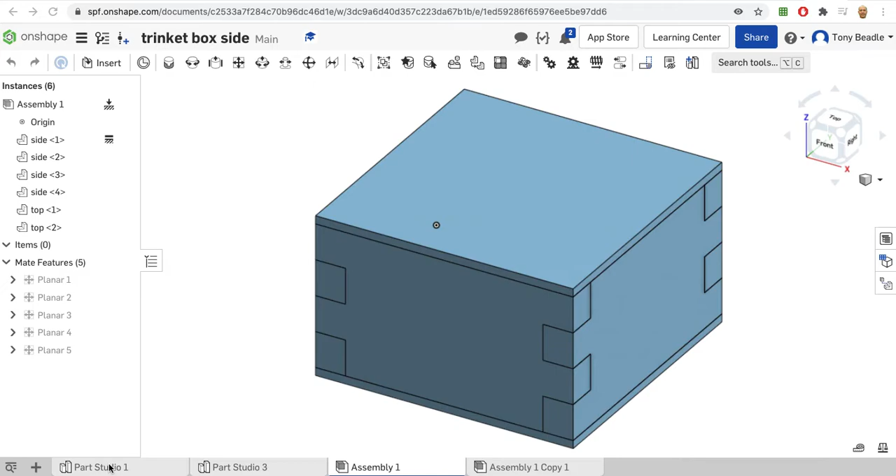For this video, I'm going to create a PC and Mac version of how to add a top and a bottom to your box. Okay, so you can see that I've got this assembled in this version here. I'm going to start by going back to Part Studio 1, which is the one that has the side panel on it, and we're going to create a new element that's going to be the top and the bottom for this box, which we know is 120 by 120 millimeters for its dimensions.

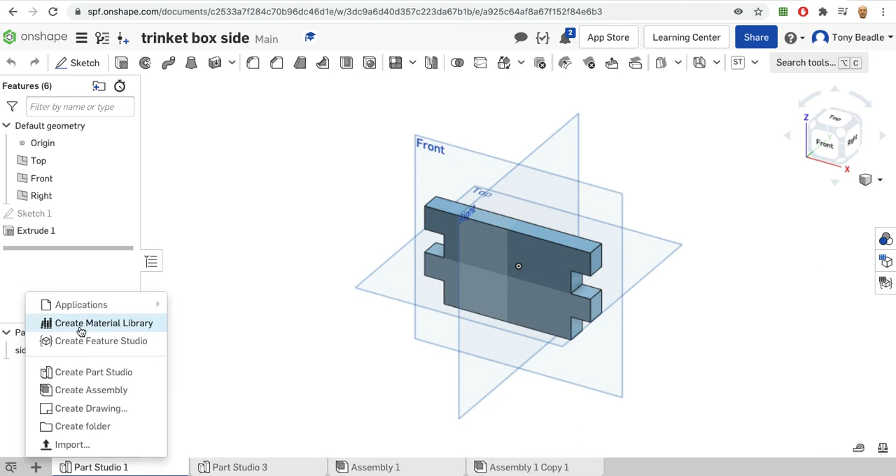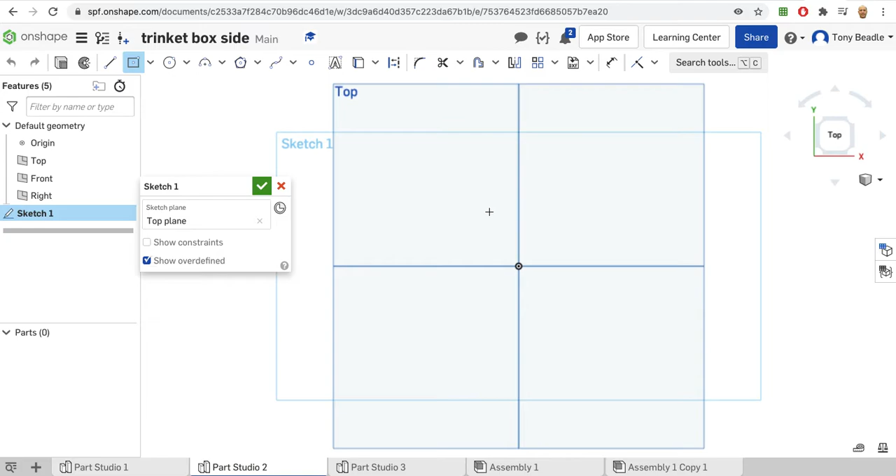So I'm going to go to the plus sign saying insert new element. I'm going to create a new Part Studio. Okay, and this will create a blank area for me to work on. I'm going to work on the top work plane and make sure I switch to the top view there. Under sketch, I'm going to click on the center point rectangle tool, move to the middle of my screen there, and drag out the shape of it.

Now with the PC version you get the dimensions appearing straight away, so we can type in 120 by 120. There we have our box shape drawn out, 120 by 120. Okay, I'm just going to take off that tool and just drag this dimension out of the way there as well, just so it's neat and tidy.

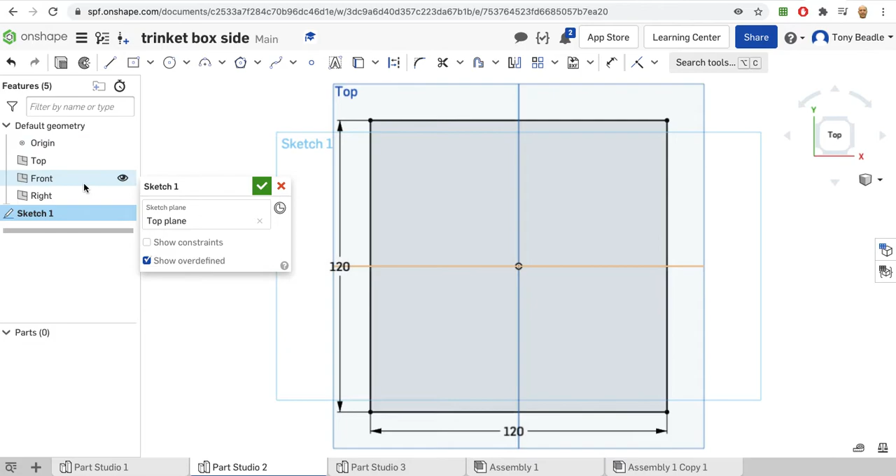Now with the sketch selected, I'm going to go to my extrusion tool and then extrude this. I know that the material I'm using is 3.8 millimeter ply, so change the depth to 3.8 millimeters and then green tick that to finish that off. So what I should have now is a panel that's 3.8 millimeters thick by 120 by 120 for its dimensions.

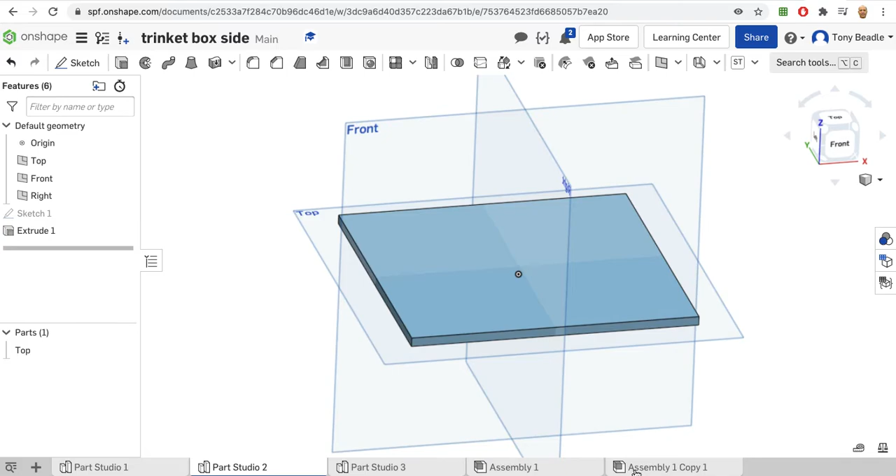Okay, and in the menu on the left hand side, I'm going to rename this part, so I'm going to right click on that and go to rename at the top there and just rename this as top. It will also be the bottom as well, but we'll just call it top for the moment. Now I'm then going to go to my assembly where I've been working, where I've got my 4 parts connected, and you can see here I actually renamed part 1 into side 1, 2, 3, 4 here, just to make it easier for me to identify parts.

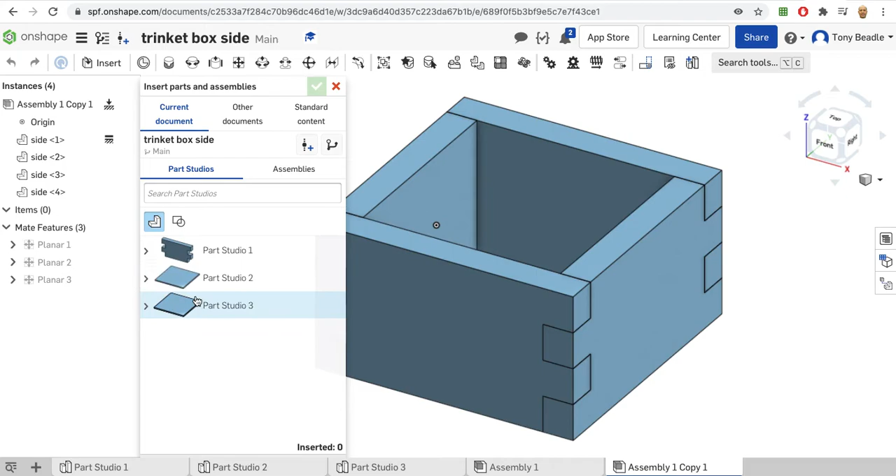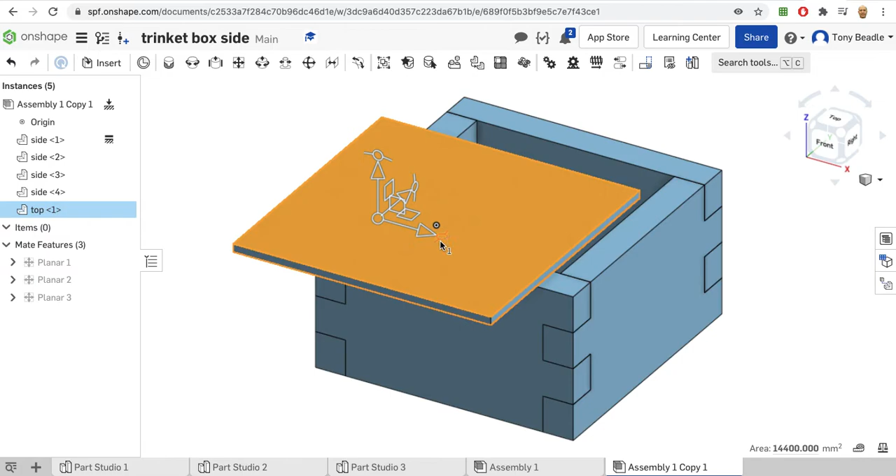So I'm going to insert, and I'm going to have a look and see. Now you can see I've created one already for this one, but this is the one I'm going to use. This part here, insert that. Okay, and that puts a copy of that onto the screen for me. And I get my triad manipulator here, which I can drag and move this part around to wherever I want to actually put it. Okay, now there we go, I can move it.

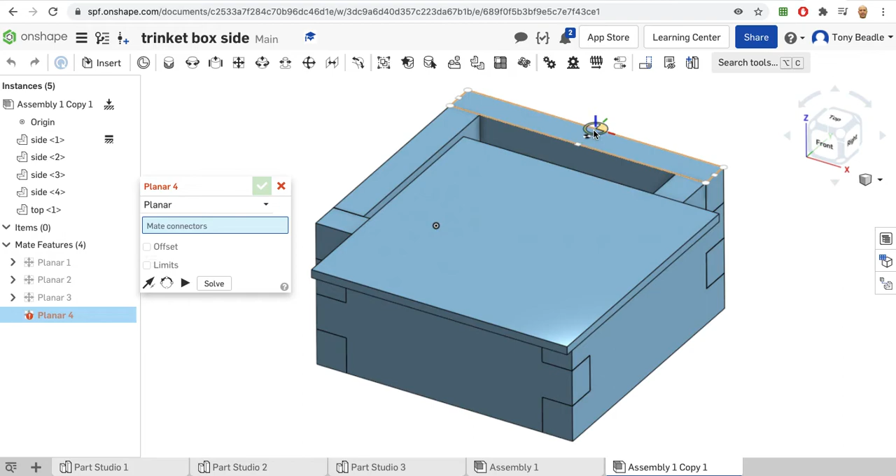So what I want to do is to mate this with the top of my object here, and then the underside of the new panel I'm bringing in here. So I'm going to choose my planar mate tool there. I'm going to click on this surface here to highlight it, and you can see there that it already shows the possible locations of mates. Now in the past we used the center one, but that's not going to be appropriate for this, otherwise our box will be in the wrong position. So I'm going to choose the edge of it this time, one of the edge tools there.

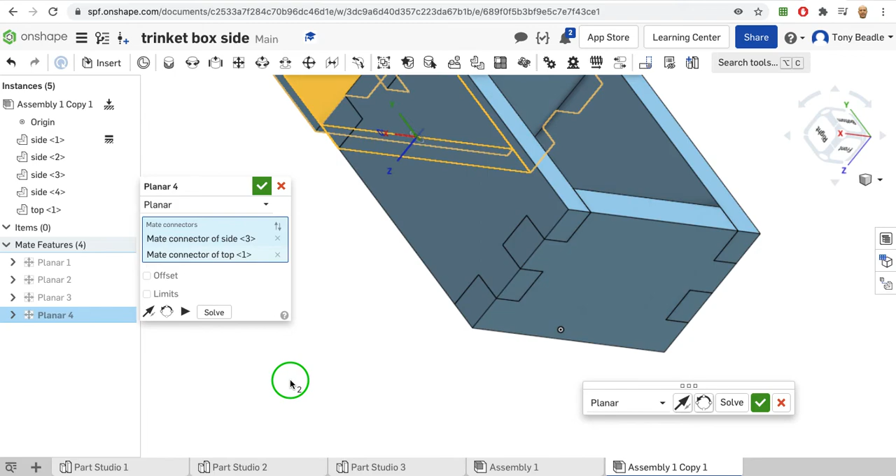And then I'm going to look at the underside of my lid here. It doesn't matter really where I put it. I'm going to choose one of the edge parts here, so that edge there. Okay, and that will move into position there. Now you'll say, well, that's not really in position, Mr. Beadle, that seems to be slightly off. But you get this tool here that comes up.

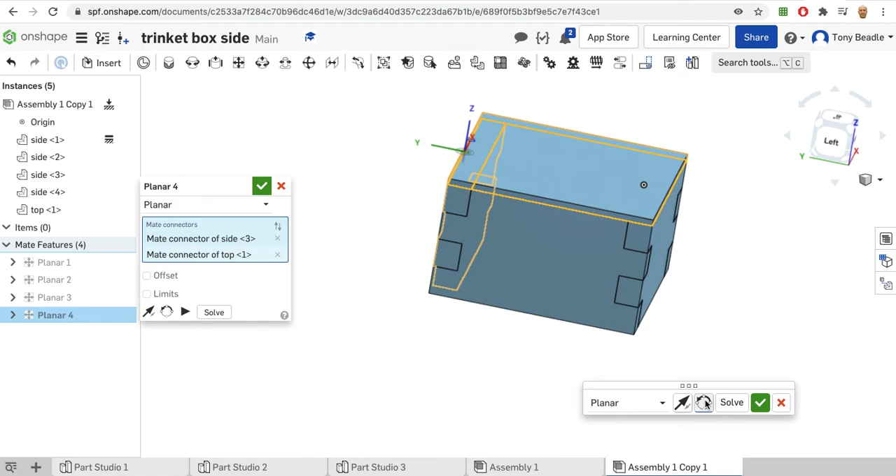What this enables you to do is to rotate your object around the mate that you've created. So using this tool here, reorientate secondary axes, I can rotate the object around till I get it to the position that I actually want it to be in. When I'm happy with that, I can then green tick that. Now it does ask for a second planar mate on the PC version. You don't need to worry about that. We can just close that off there. That's enough to lock it.

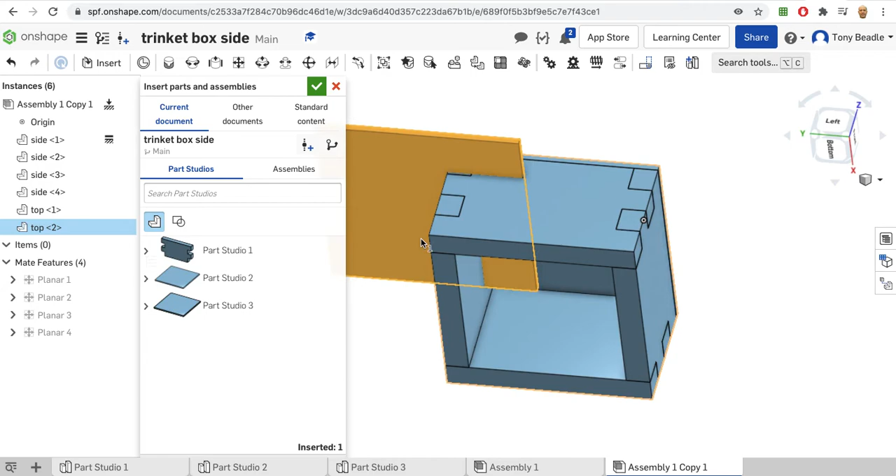So I'm going to insert the bottom part here, which I know is identical to the top, so that's fine. I can just bring that in. So I'll put that roughly there. Green tick that. And again, I can use my manipulator to roughly position where this is going to be. I'm going to take my planar mate tool. I'm going to pick a point on the underside, again picking the edge there. Okay, that's for one.

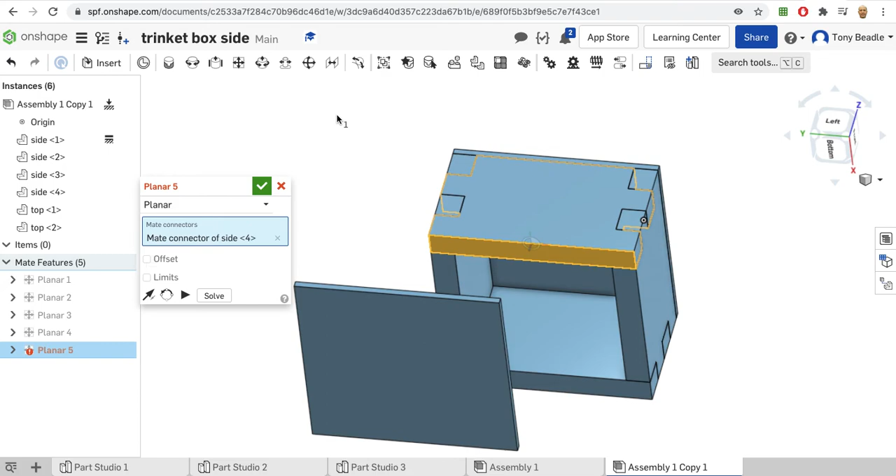And then I'm going to rotate this around. I'm going to pick the edge of the top of the bottom panel, if you see what I mean. So I'm looking at the edge there, and that should move into position there. I don't need to rotate it because it's correctly in position, so green tick to place that there. And now I have my box set up with a top and a bottom all ready to go.